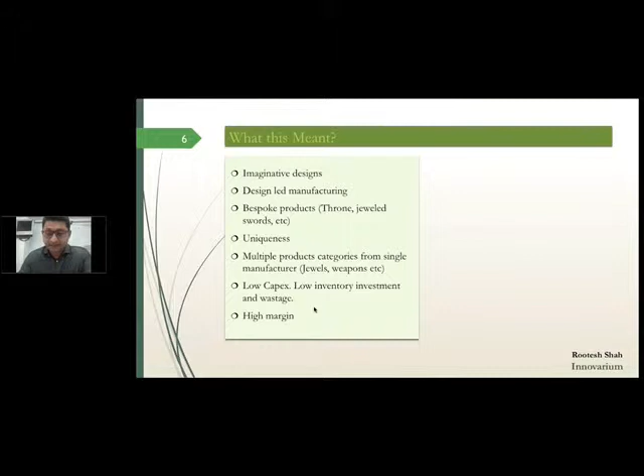There was no quality control. Products were very expensive. Delivery was slower. It was localized manufacturing, which means the best resources were never used. It was an inefficient way of manufacturing, and it was low volume.

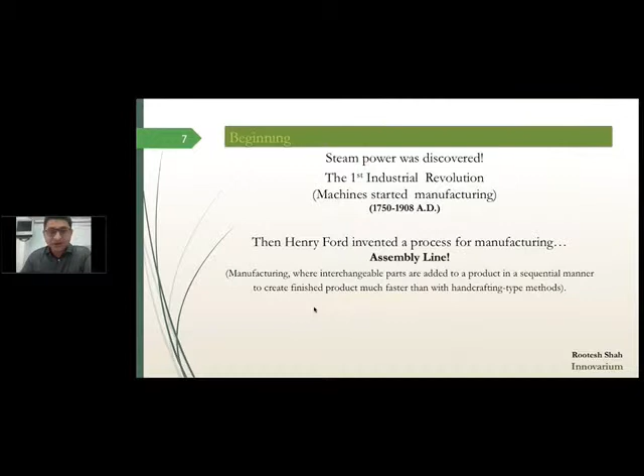Then steam power was discovered, and we had the first industrial revolution. With cars coming in, Henry Ford invented a process called the assembly line. An assembly line means - well, you know what, let me just show you what happens in an assembly line.

Even today, in spite of all the modernization, we still use assembly line manufacturing. So what are the pros? Now you have uniform quality, cheaper products, faster delivery, wider geographical markets, and efficient use of talents and resources, and you can now produce higher volumes with the same quality levels.

And what are the cons? Now it's manufacturing-led designing. You have standardized products. There's no uniqueness in ownership or experience. The manufacturing categories taper out for each manufacturer, higher capex, higher inventory costs, hence more working capital, and as you know, lower margins.

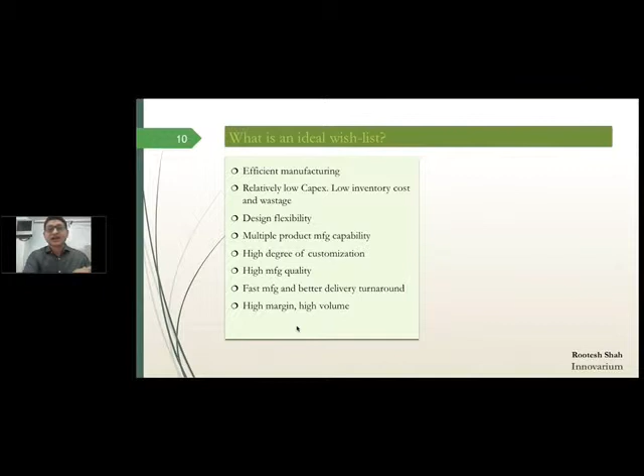So what is our wish list? Obviously, all the pros of the pre-industrialized way of manufacturing and the industrialized way of manufacturing. And of course, we don't want the cons of either of them. Is that possible? Of course it is. Well, if not all, then most of it - it is possible now with 3D printing.

However, that requires strategy and a manufacturing ecosystem around the 3D printing technology. This strategy is the pivot around which you can create your manufacturing ecosystem for 3D printing. So what is 3D printing?

3D printing is a manufacture of end-use components using additive layer manufacturing process. Let me come back to that point. Additive layer manufacturing - ever since man started manufacturing, they have used subtractive manufacturing, which means what?

You take a material of choice and then pare it down to the design that you require. For example, if you're going to make jewelry, you take a bigger piece of gold or platinum or whatever material of choice, then cut it, mold it, drill it, grind it, whatever, to the design required. And it was the same probably for every other industry. So for thousands of years, man had used subtractive manufacturing.

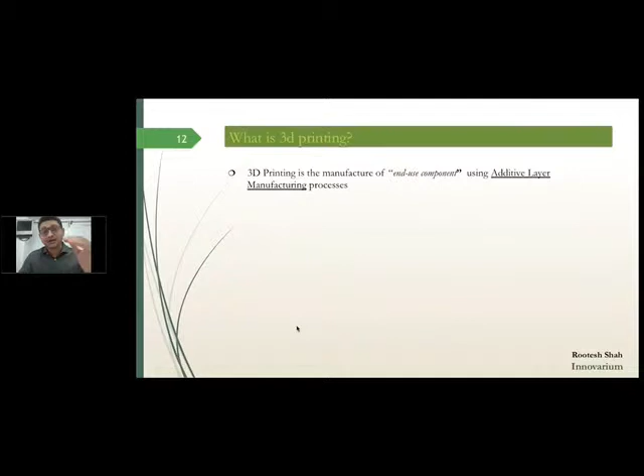3D printing is completely opposite. It is additive manufacturing, which means the 3D object or the end-use product is manufactured layer by layer till you get the object which is for end use.

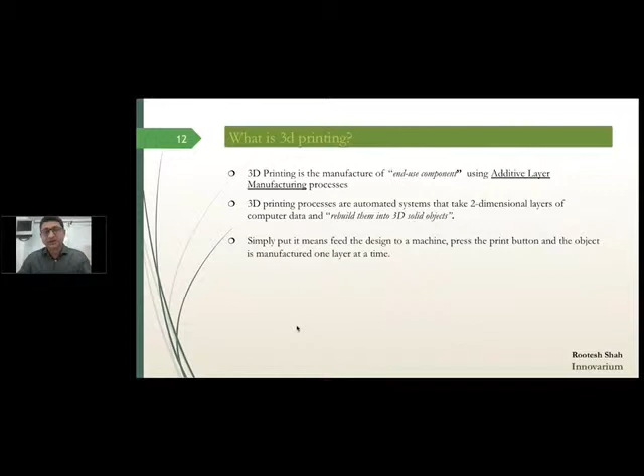The printing process is automated. It takes a two-dimension layer from the computer data and rebuilds that into a 3D solid object. So from byte to atom. Simply put, feed the design into a machine, press the print button, and the object is manufactured layer at a time without human intervention - meaning no forging, casting, or any of the conventional processes. Of course, this is a simplistic way of putting it, but this is the concept. As we go along, I'll explain further.

So how does the 3D printing process work? There are several technologies within the 3D printing umbrella. However, this is the common process throughout.

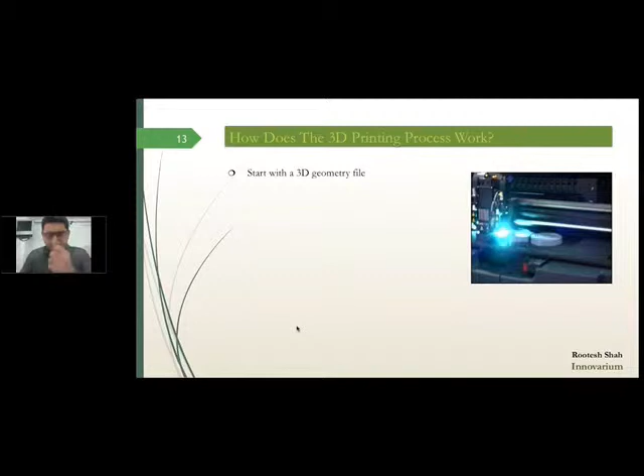To start with, you have a 3D geometry file, which is normally known as a CAD file in the jewelry industry, and which is fairly ubiquitous. From the CAD file, there are software that generate a .stl file, which is a file readable by the machine. The parts need to be oriented so that optimum efficiency is used for the machine.

Generate support structures - support structures can be generated by the machine and the software itself, or in case of metal 3D printing, you need special technicians to do that. There are software within the machines that will slice the files and supports horizontally.

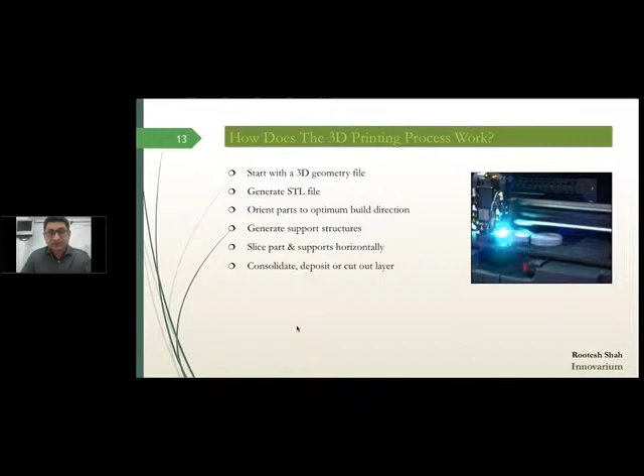The material is consolidated and cut layer by layer. The machine is indexed up or down, one layer at a time, and the machine starts the layering process, which is repeated thousands of times till the 2D design, read by the machine, is converted into a 3D printed object.

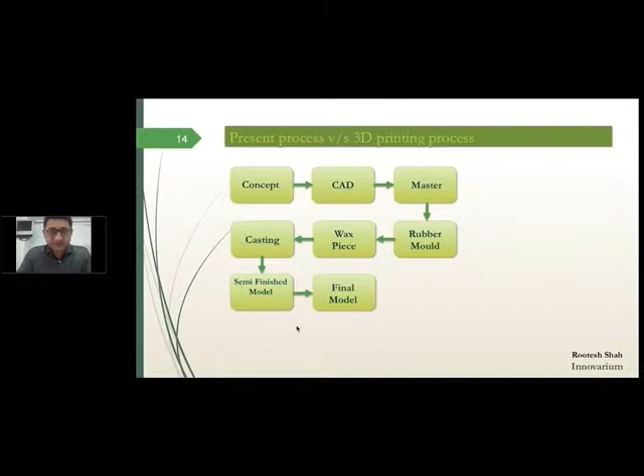So let's get a comparison in a nutshell. Say in investment casting manufacturing, you have the concept, followed by the CAD design, followed by a master mold. From the master mold, you'd make a silicon or rubber mold. You would shoot a wax piece inside that, make a tree, put it in casting. After the casting, it comes out a semi-finished piece which you polish, grind, whatever post-process is to be done, and then you have the final piece.

With 3D printing: concept, CAD, semi-finished model, final model.

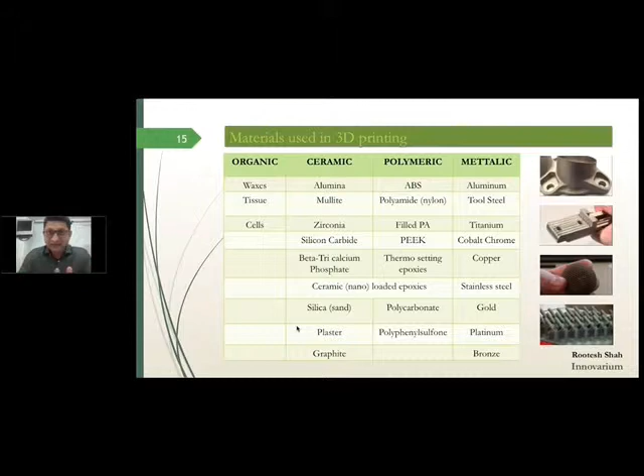So what materials are being used in 3D printing? Organic, ceramics, polymeric which are plastics, and metallic. The interest to us is the precious metals, so gold, platinum, silver is being used. In gold, 18 karat is the material of choice as it stands right now. 14 and 10 karat are in R&D at this point of time.

And who are using this? Car companies, defense, large production factories, avionics, medical, and consumer.

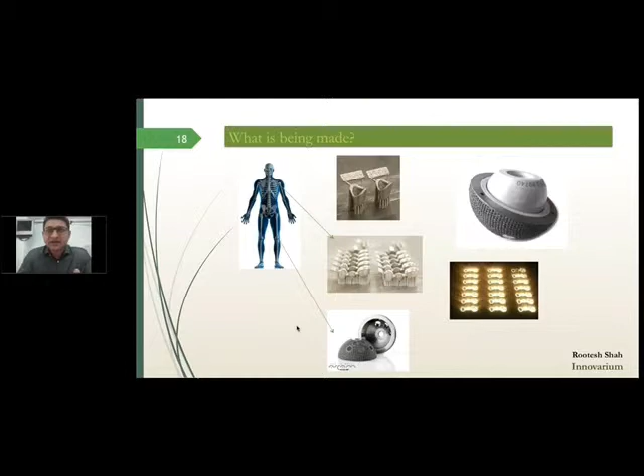These are some of the products being made. This is bespoke jewelry made in titanium. Critical parts made for high-tech industries.

So why all this fuss about 3D printing? Well, the creative commerce industry, which is the jewelry industry, is a design-centric industry. Each market is unique. Material loss is a very big factor to our bottom line. Customization is the mother lode which everybody wants at a minimal cost. Lead times from concept to delivery is extremely crucial. Inventory costs affects our cash flow dramatically. People are asking for lower quantities per design, more design variation, more design iterations per design, and our product life cycle is shortening. For each of this, 3D printing could be an excellent leverage.

So let's look through the different types of 3D printing technologies available for printing in precious metals. The first one being SLA. Most of you probably know this because it has been ubiquitous in the jewelry industry for the past decade and a half. Here, a photopolymer resin is used and an ultraviolet laser is used to draw on the resin to create the design that is required. But let's go through a video that actually explains this.

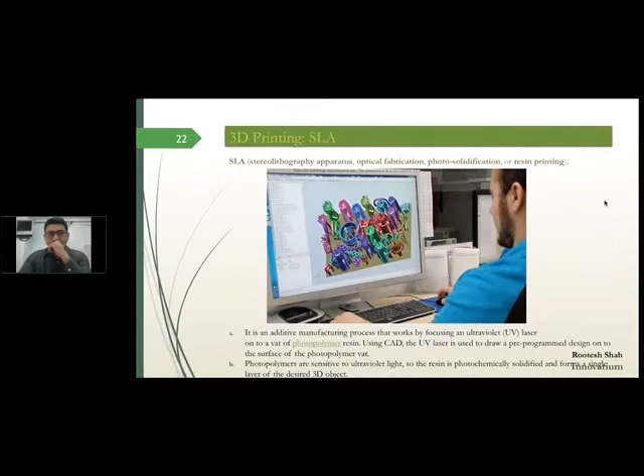Off the printer and then show a customer.

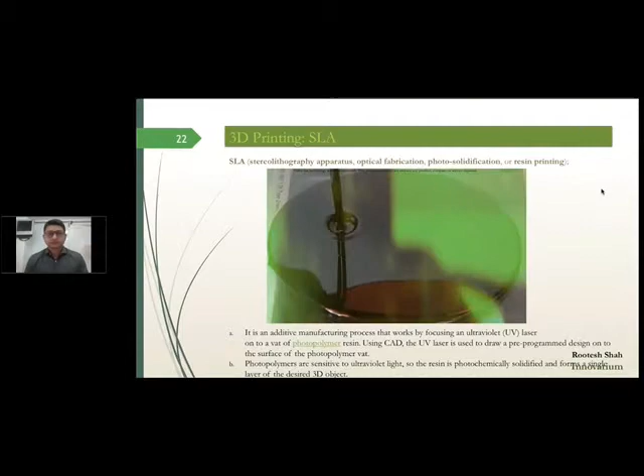We direct cast the PIC 100 green material, in my opinion, one of the best materials that EnvisionTEC offers, especially when it comes to the casting process. Customer will upload or send us...

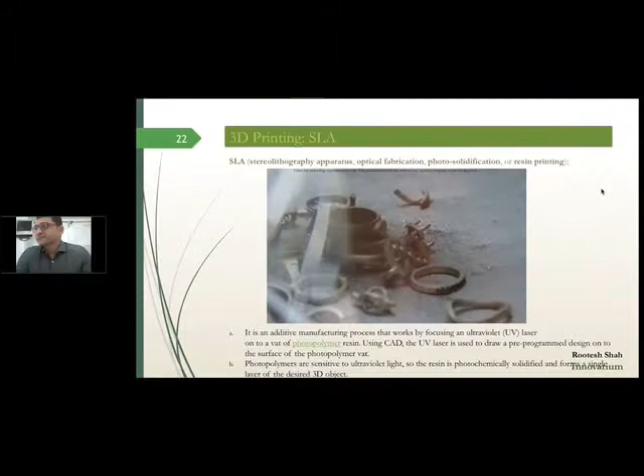So what are the advantages and challenges for SLA printing? Well, faster cycle time to make the master mold, a very high level of accuracy as compared to the traditional way of making molds. Open softwares are available. These are low-cost printers, making it very easy for even the smallest of jewelers to buy these printers.

What are the challenges? It is low volume and primarily for making molds and not production. It does not greatly reduce operations on the manufacturing floor, except for the mold making part. And well, of course, the silver master still needs to be made from the resin. But this is a good 3D printer for design validation.

The next one is digital wax printing. Instead of resin, now you have digital wax, which is a castable wax. This changes the method of 3D printing. Secondly, the 3D digital wax machines have a higher volume, which means that now you can take out production batches from the 3D printer. All the designs are digital, so molds are not required. All your molds are digital. Design iteration is virtually free of cost.

Let me show you a video for that.

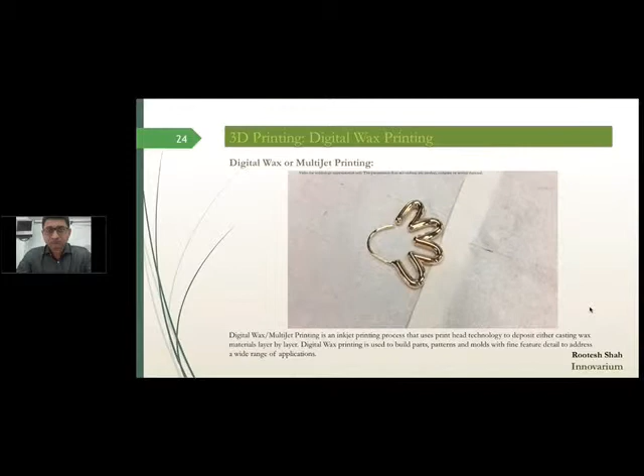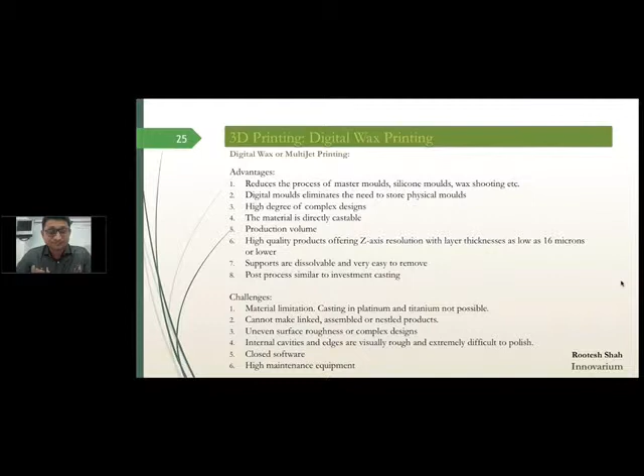So the advantages and challenges of digital wax printers: it reduces the process of master mold, silicone mold, wax shooting, etc. Just 3D print your designs in volume and send it for casting. Just brilliant. The digital molds eliminate the need to store physical molds. A high degree of complex designs is possible with digital wax machines. The material is directly castable.

You have an extremely high quality of product offering. The supports generated by the machines are dissolvable as seen in the video, and extremely easy to remove. The post-process is similar to investment casting, which makes it very easy to integrate within the existing system of operations.

The challenges: there are material limitations. You can't cast in platinum or titanium. You can't make linked, assembled, or nestled products. So products like bracelets or links with chains are extremely difficult to make.

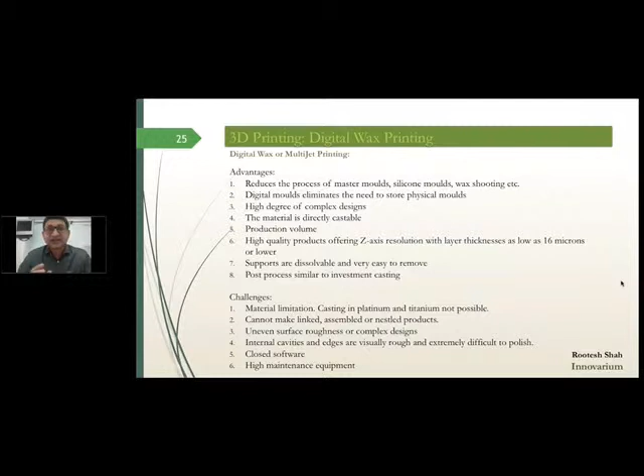There is uneven surface roughness in case of very complex designs, which are very difficult to post-process. The internal cavities and edges are visually very rough and are very hard to polish. And it's high maintenance equipment.

And last but not the least is direct metal laser sintering, or DMLS. It is also called selective laser sintering, or SLS, or SLM, which is selective laser melting. This is the one I'm most excited about.

Now, the difference between SLA and digital wax versus metal printing is that SLA and digital wax printers can be easily integrated into the existing manufacturing ecosystem, because after a certain point, it still uses the same manufacturing system which has been used traditionally.

DMLS eliminates all that, because with DMLS you print directly on metal. Hence, it eliminates even the casting process. Straight away, the 3D printer prints on gold, platinum, silver, or titanium powder. The parts are made and they go straight for post-processing and final shipping.

So how is it done? In the same probably way. It's a CAD file, which is turned into an .stl file. The second part is extremely important: a technician works on the 3D model to create the support structures.

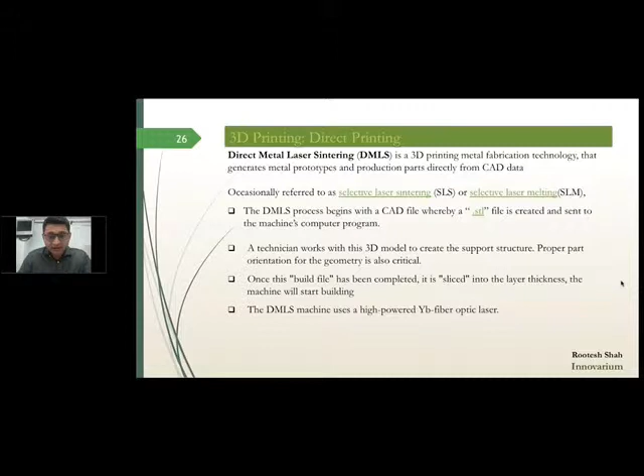Once this build file is completed, the design is sliced into thin layers by the machine's software. The DMLS machine uses a high-powered fiber optic laser. Inside the build chamber, the material of choice is in the dispensing platform, and a recoater spreads the material in a 20 to 30 micrometer layer.

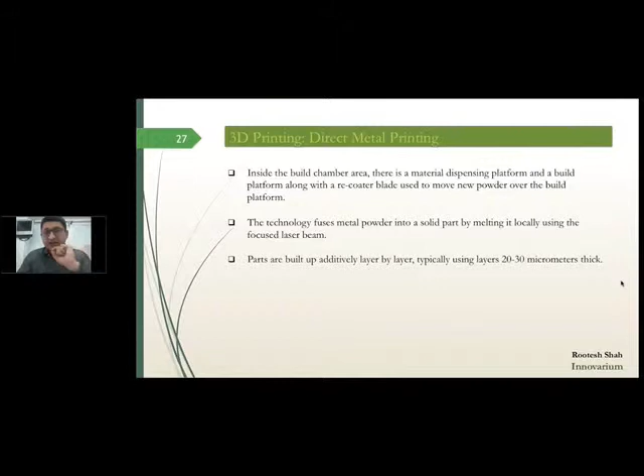The laser focuses its beam on the material, reading the STL file. It melts the powder where the design needs to be solidified. Once the entire job is completed, the build platform is extracted and the parts are physically cut from the platform. Then the parts are post-processed as required. So let's see a video that demonstrates the entire process.

What's your emergency? I need metal parts fast. Fast? Yes, fast. How fast? Like tomorrow. Tomorrow, eh?

DMLS allows for conformal cooling channels within tools and tooling inserts, as well as customized medical implants. It makes it possible to design internal features and passages that cannot be cast or machined. Complex geometries with multiple components can be simplified, eliminating the need for assembly.

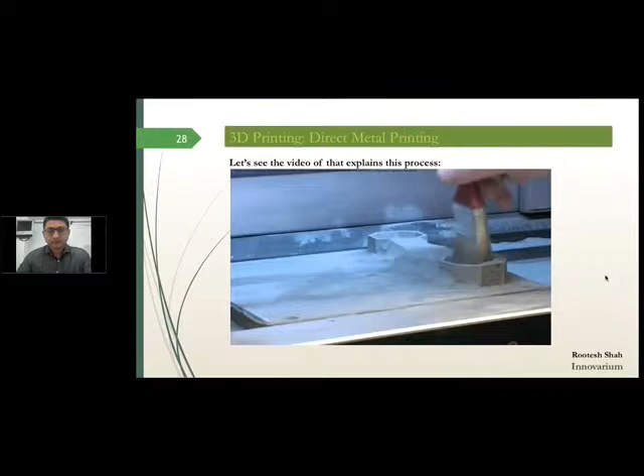The lead time for receiving a traditionally tooled part can take weeks, creating a large bottleneck in the production process. DMLS produces parts in a matter of hours or days, with excellent mechanical properties, high detail resolution, and exceptional surface quality.

DMLS parts can undergo functional testing in the environment for which they were designed. Since DMLS uses most alloys, prototypes can be made out of the same material as production components. The ability to generate functional metal prototypes in short order radically impacts design processes, accelerating design cycles for time to market.

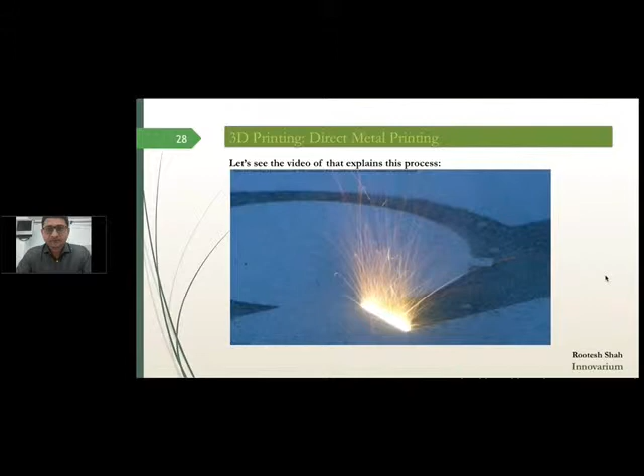The advantages do not stop at prototyping. DMLS is one of the few direct digital manufacturing technologies used in production, increasing design efficiency for technical applications. DMLS technology delivers unlimited potential for engineers to create previously impossible solutions, embracing a new era of design-driven manufacturing.

Delivery from GPI Prototype for the pressured engineer.

GPI Prototype? You guys are the best. Thanks a lot. Another happy customer.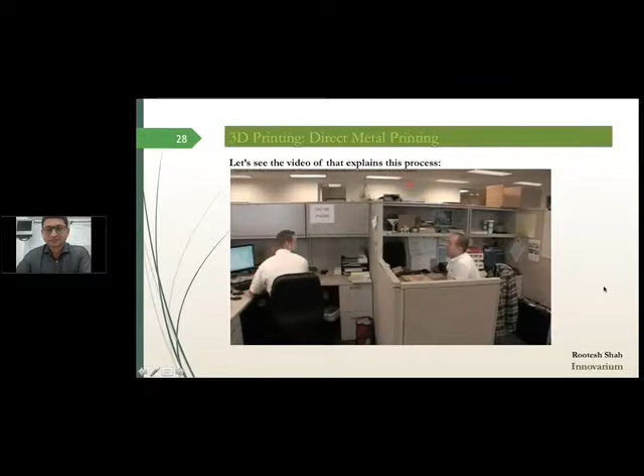So, what are the advantages of DMLS? DMLS can print in most metals and alloys, including platinum and titanium. So, for example, you can have hollow platinum and titanium jewelry.

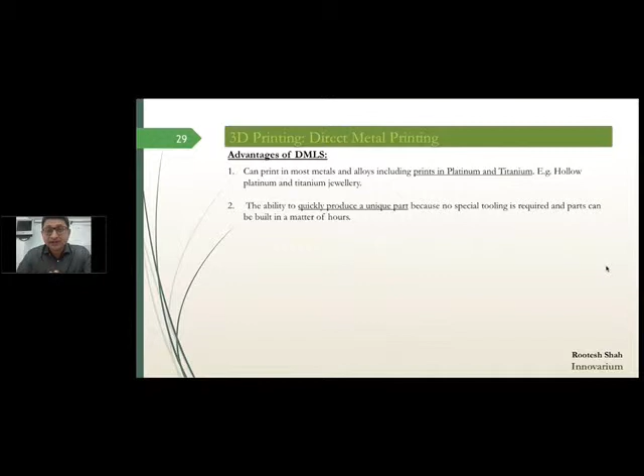This has the ability to quickly produce unique parts because no special tooling is required, like molds and things like that, and parts can be built in a matter of hours.

Since it's built layer by layer, it's possible to design internal features and passages that were impossible to do in casting, machining, or even other 3D printing technologies like digital wax or SLA technology.

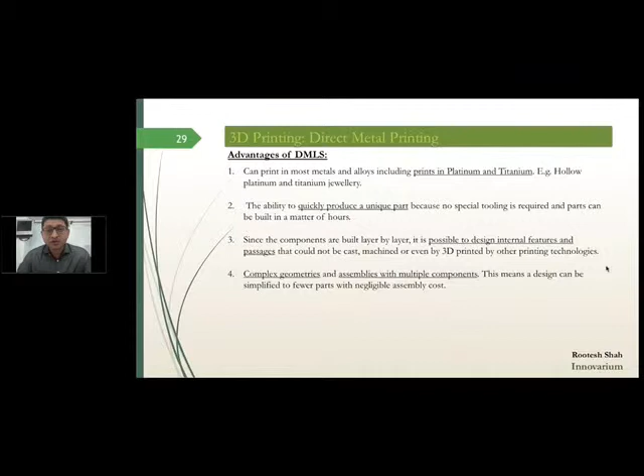You can make extremely complex geometries. You can make assembled pieces, with multiple components printing at the same time. This means the designs can be simplified to fewer parts at negligible assembly costs.

Since DMLS can use most alloys, prototypes can now be functional prototypes made out of the same material as a production component. For example, a functional prototype can be printed in brass before commencing production in the precious metal.

And DMLS does not require any special tooling or molds like casting, so mass customization and short production runs for complex designs are absolutely possible.

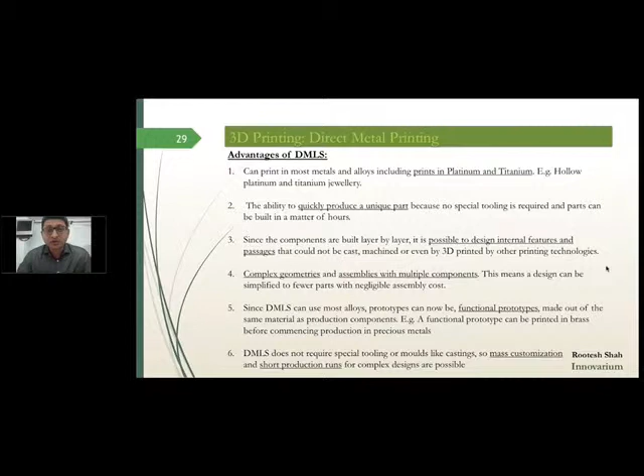And what are the challenges? It has a high capital cost, well, in relative terms.

It's getting disconnected. Got it. Disconnected. Alright, then we continue with that.

So, challenges of DMLS: high capital cost, well in relative terms. A few years ago, a machine would cost somewhere about 250,000 euros for precious metal machines. It has come down to less than 100,000 euros, and the costs are going down.

The system needs to be operated in controlled environments because gas is used in the vacuum chamber.

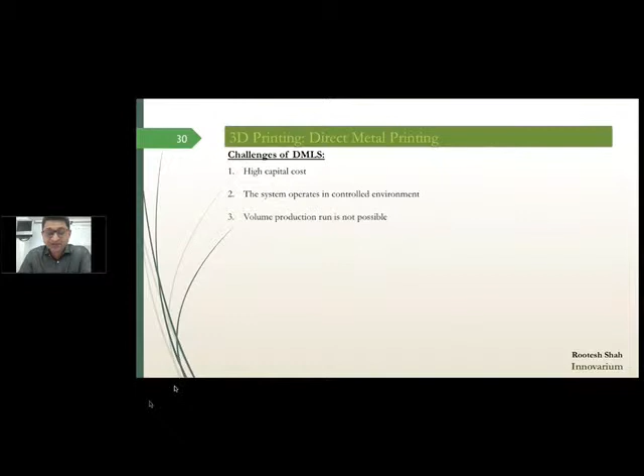Volume production run is not possible. We can have short batch production, but not volume production as in digital wax.

It requires additional equipment for post-processing, especially to take out the support material, although this post-processing equipment is not very expensive.

Very importantly, it requires a separate skill set to create designs for this technology, because far more complex and unique products can be created, and the support system is an integral part of designing.

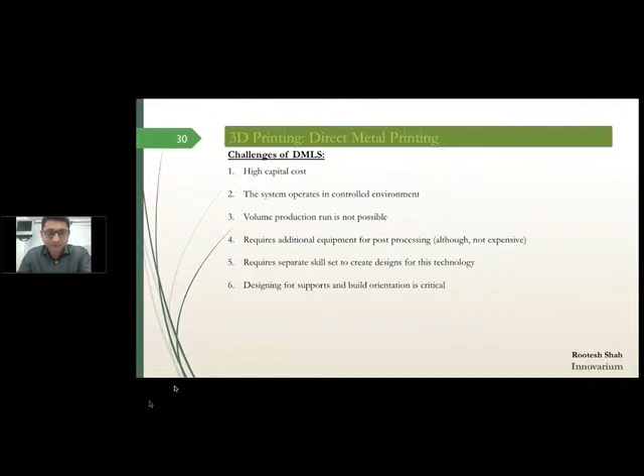The printed supports cannot be reused, so typically these supports are melted to recover the metal.

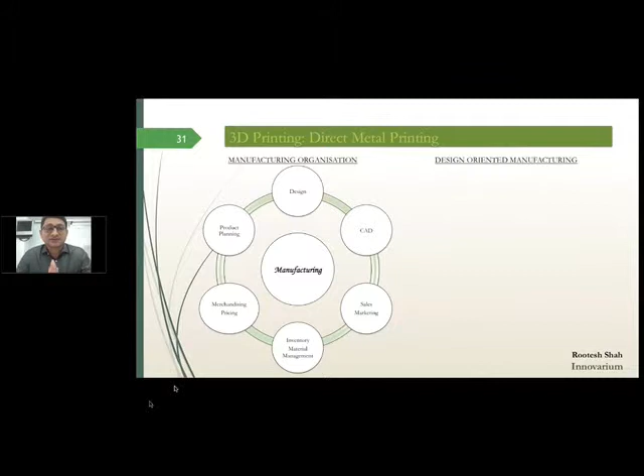One of the key philosophies of direct metal printing is that it is not a manufacturing-led system. In any other way of manufacturing, the actual fabrication is the key, and design, CAD, product planning, merchandising, everything is centered around fabrication. The limitations or opportunities that fabrication provides are what design, product planning, and material handling revolve around. With DMLS, it is design-led manufacturing, which means design is the key.

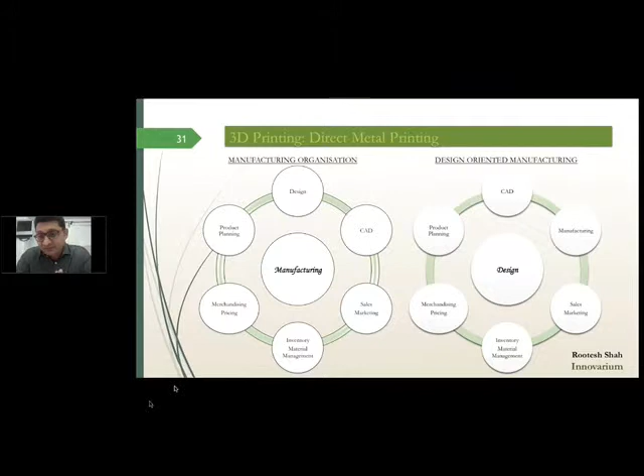Manufacturing, inventory, merchandising, product, CAD, everything centers around design. This comes back to my first point, that 3D printing allows design to be value-added rather than the manufacturing strength. And this is the key to 3D printing in direct metal.

To have a short analysis of printing in direct metal, there are 4 aspects to it: whether you're prototyping or in production, meaning short batch production; the part orientation, including the geometry of the design and internal features; the file preparation, which includes support structures, orientation of the part, and the platform build; and last, the process, meaning what happens after the piece is printed and the process in its entirety.

I personally believe that 3D printing equipment, or the 3D printing machine, is only one link in the overall 3D process chain. Design and post-processing, while time consuming, are extremely important to achieve optimum part quality.

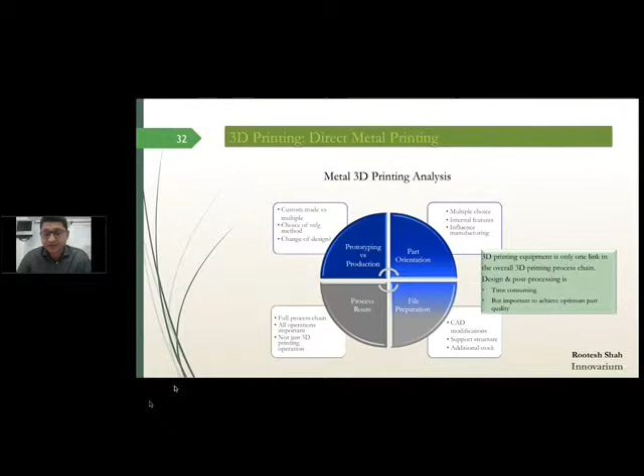A word on supports. Supports are extremely critical while printing directly on metal, and they have their own functions: they support the melted surface, dissipate heat from the surface, and prevent the surface from deforming. It's a necessary evil.

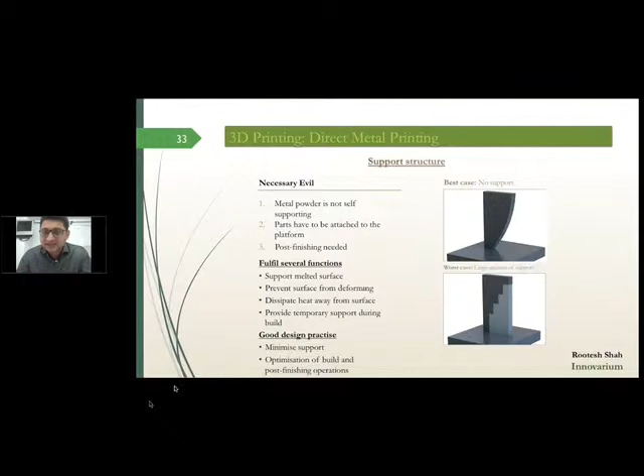I've also seen that many designers who have used DMLS have actually incorporated the support structures within their design, creating a separate design element, which is a very clever way of using the DMLS process.

So let's go ahead and see a video of actually printing gold parts.

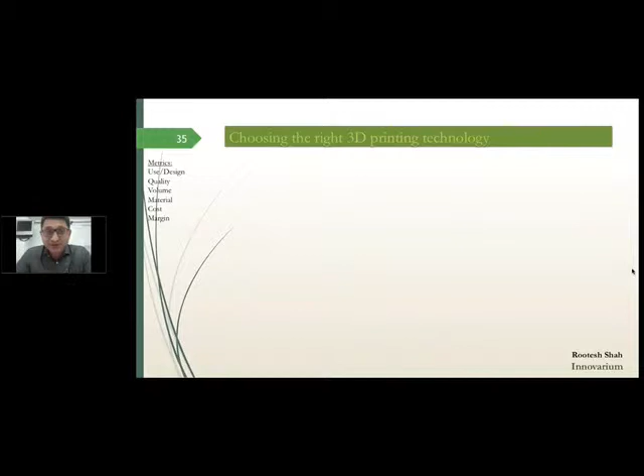This clears up and gives you insights into the 3D printing technologies which can be used for precious metal. But the next question is, how do you choose the right 3D printing technology for your operations? For that, I would use some metrics for deciding that.

Number one is, what is the usage, or what kind of designs you would like to generate? What is the quality level? What are the kind of volumes? What is the choice of materials? What is the cost involved? And of course, at what price and margins will you be able to sell?

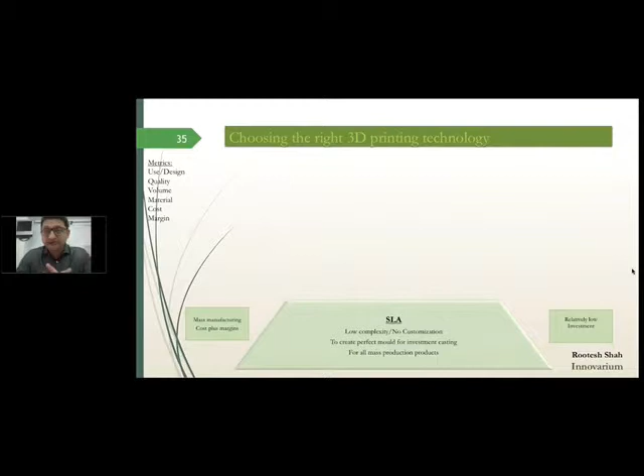SLA, of course, is the choice if you are going to go for very low complexity without any customization. It is a very low investment, and it could be used for mass manufacturing, and the margin strategy could be a cost plus margin.

The digital wax printer gives you semi-customized, a very high degree of complexity. You can make hollow gold and silver products, take special orders, special collections. It's a medium investment. A smart manufacturer could have product-wise market share depending on the design capabilities, and it could be an incremental margin strategy.

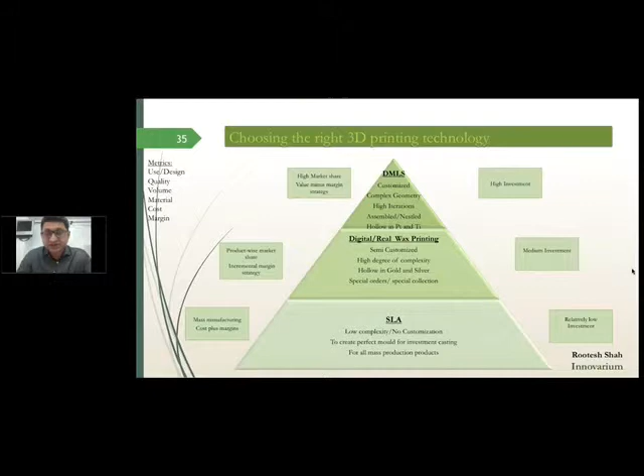DMLS should be used for customized jewelry with very high degree of complexity, with high iterations per design. If you have assembled or nested pieces, as in bracelets or chains and things like that, or for hollow platinum and titanium products, here it's a high investment relative to the digital wax or the SLA printers, but a manufacturer who can combine the existing technology with DMLS can get a very high market share, and the strategy could be a value minus margin strategy.

Having seen what kind of 3D printers are available for printing in precious metals and how to choose them, it's important to have a strategy and to create an ecosystem around 3D printing. As mentioned earlier, just the 3D printing machines are not going to do the trick. It's how a manufacturer creates a focused manufacturing system around 3D printing.

So the strategy will decide what kind of markets you will cater to, which in turn defines what kind of products you're going to make, which also decides what kind of 3D printing technology you will buy. So the questions to ask for acquiring machines are: which printers will you acquire, where will you build them, for which material, how do you define your product strategy, how will you hire people, and how do you create processes. That's one part of the ecosystem.

The second part is that once you have the physical part of the manufacturing system, how do you build teams around 3D printing technology, who spearheads it, how do the teams communicate, and how do you create systems to enable teams to respond faster to the market feedback for the designs which could be 3D printed. But most importantly, every member of the team needs to understand how 3D printing could be leveraged. Hence, communication is very, very important.

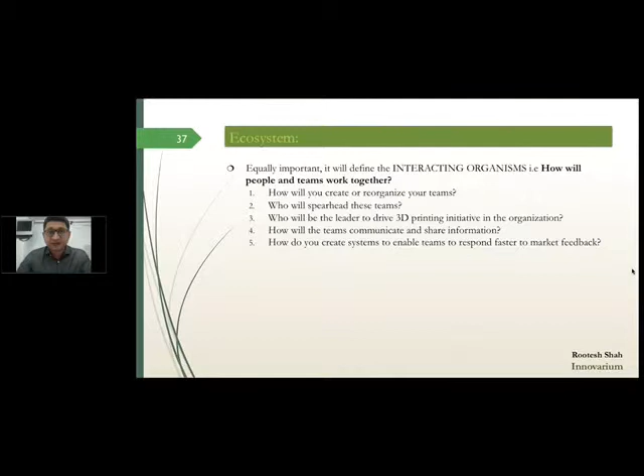To create a very profitable roadmap, a 3D printing manufacturing ecosystem has to be based on a sound strategy. So typically, this is how an ecosystem would look like. You would have a 3D printing leader who would have all the critical information and is the pivot around which the entire system operates.

Then you have the designing team with its functions, the R&D team, the CAD team, manufacturing, post-process and QC, sales and marketing team. Now, traditionally, there would be a lateral way of working, in which each department works in a silo and really doesn't know what the other department is doing. With 3D printing, that doesn't work. Each member of each team needs to understand what is happening. Hence, the communication would be all around. All the design teams would communicate to the leader as well as to each other.

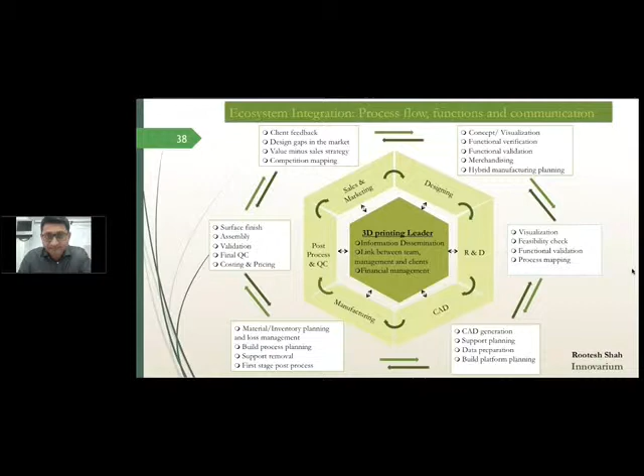And why so? Because each member of the team needs to understand which criteria is being leveraged when using 3D printing. Is it the material cost? Is it the design? Is it the tooling cost? Is it the assembly? Is it the lead times that you're addressing? Is it the customization? Is it the low quantity but high quality production? Or is it the just-in-time inventory?

3D printing can address all these issues provided each member of the team and all the departments understand the potential of 3D printing in which to leverage these parts. It is vital to create an environment to enable the teams to view 3D printing as a complementing technology and not a competing one. And most important is the leadership, who should work continuously to integrate 3D printing within the manufacturing ecosystem. Only then is 3D printing most effective.

So let's go to pre-build, post-build, and hybrid manufacturing. Pre-build and post-build refers to those parts of the production process which do not have anything to do with the fabrication of the 3D printed parts, meaning everything that happens before and after the machine prints. The total time taken for pre-build and post-build is 65 to 70%. Hence, it's imperative to think through them in terms of the complexity of the geometry, which is your design, and what kind of material you're using.

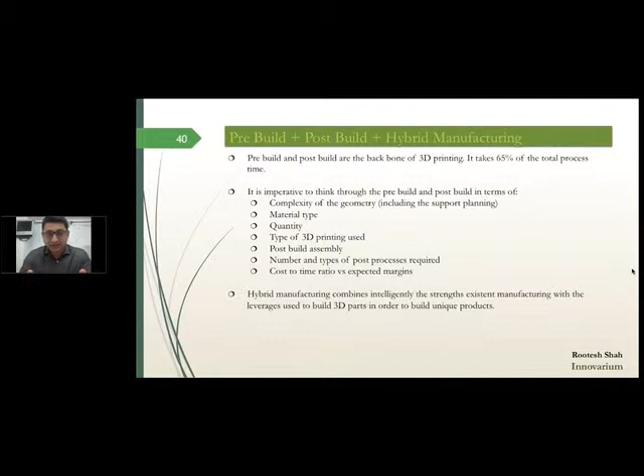Hybrid manufacturing is actually combining your existing strengths with the strengths of 3D printing to create newer products and newer markets and to build very high entry-level barriers. If used well, it creates new business opportunities and an opportunity for higher margins. 3D printing allows new product categories and designs previously impossible to make.

So in terms of teams, this is how it would be segregated. Pre-build will have designing, research and development, CAD data preparation, sales and marketing, because they give the market feedback. Post-build provides post-build processing, assembly validation, QC, R&D, cost and pricing, logistics, sales and marketing. And build has manufacturing and material management.

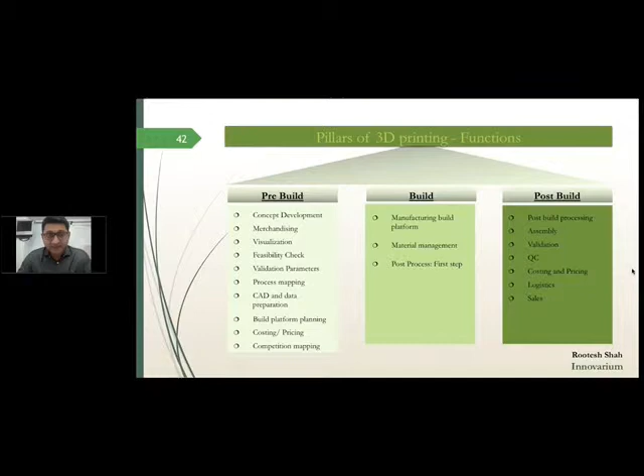And in terms of functions, pre-build and post-build, as you can see, have the maximum amount of functions. Build has minimum. And that would give you an idea that a 3D printing ecosystem has to have a strategy.

After doing all that, it's also vital to plan your products for 3D printing. As a thumb rule, if a product can be done effectively with the conventional way of manufacturing, do not use 3D printing. However, if your designs are inefficient to produce conventionally, or require faster lead times, or require low weight, then 3D printing is your choice. Within that, search for the cheapest 3D printing technology that can satisfy your orders.

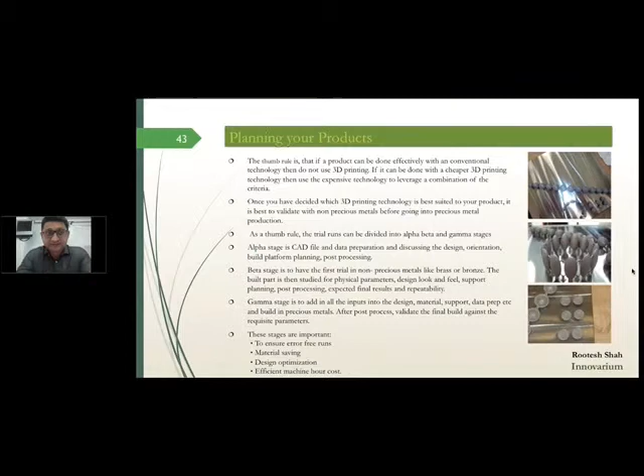Once you've decided on the 3D printing technology to be used, it's best to validate in non-precious metals before going into production in precious metal, especially with DMLS.

As a thumb rule again, I would have 3 stages of trial run: alpha, beta, gamma. The alpha is typically on the computer at a data stage, where the data, the CAD file, and the build platform are validated by the design, R&D, and manufacturing team. All that information is collected and fed into the beta stage. By this time, a lot of your designs would either be rejected or need to be modified.

At the beta stage, you have the first trial run in a non-precious metal like brass or bronze. This is for the functional and physical verification of the design. The part is then studied and validated for the design, look, feel, the support structure, what post-processes need to be done or should be planned, the expected final qualities, and the tolerances and repeatability of the design. Sometimes it's great to have a complex design, but extremely difficult to have repeatability, and that gets eliminated at the beta stage.

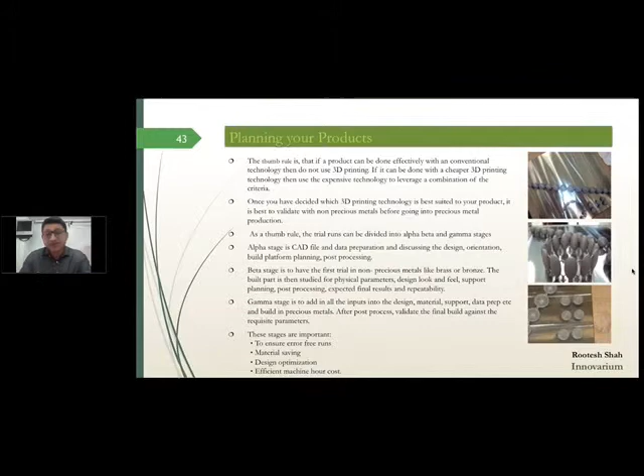So finally, let's have a little case study in pre-build, post-build, and hybrid manufacturing. This is part of an earring which needs to be 3D printed. If I needed to print this in gold or silver, I'd probably use a digital wax machine, especially for a volume run. If it's a one-off, low price piece, I would instead make it 3D printed in SLA and then make a master mold out of it.

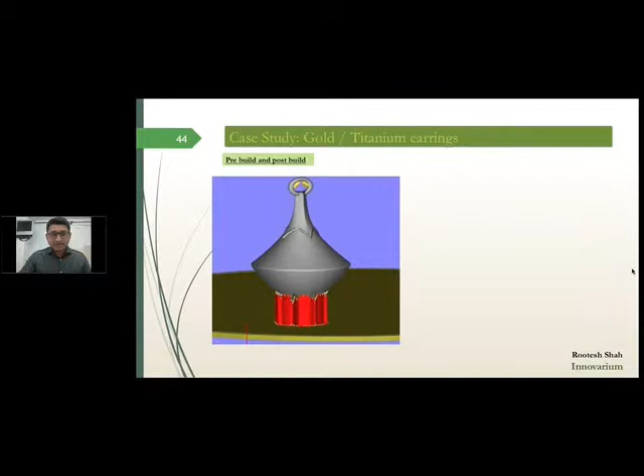As you can see, the red parts are the support structures, and these are the design notes. It says this is a good design suitable for DMLS. If I were to make it in, say, platinum or titanium, it's hollow and has self-supporting angles, so minimal supports are needed, which is great because the post-processing costs are lower. The wall thickness is about 0.5 mm.

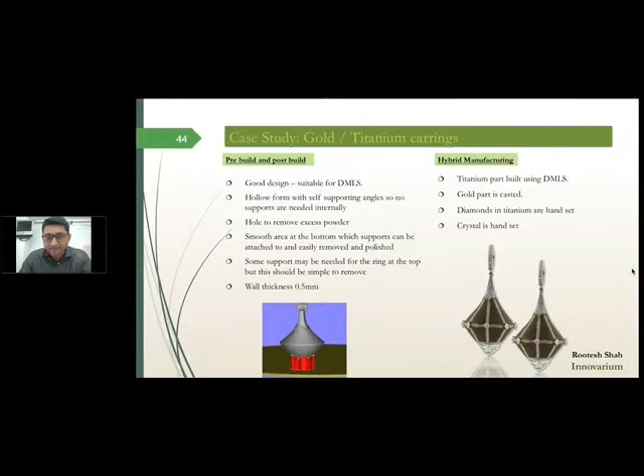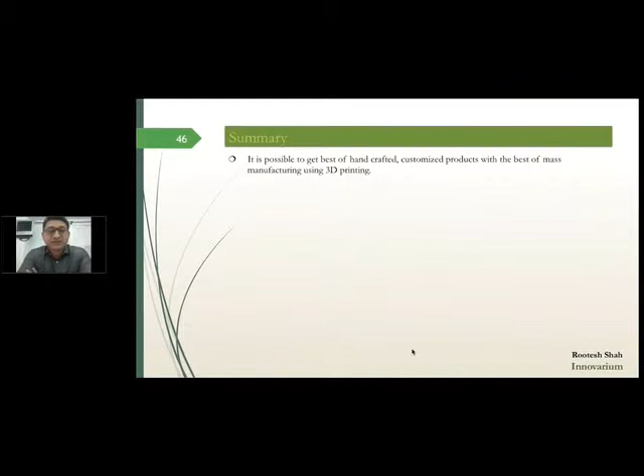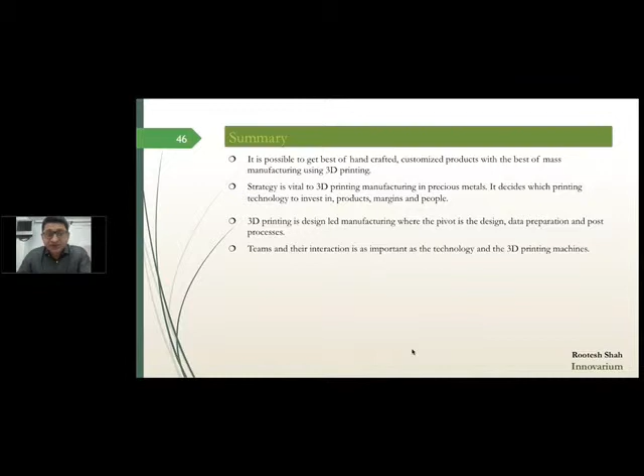So in summary, it is possible to get the best of handcrafted, customized products with the best of mass manufacturing using 3D printing. Strategy is vital to 3D printing manufacturing in precious metals. It decides which printing technology to invest in, which products, what kind of margins, and the people to invest in. 3D printing is design-led manufacturing, where the pivot is the design, data preparation, and post-processes. Teams and their interaction are as important as the technology and the 3D printing machines.

Pre-build and post-build processes are the main pillars of 3D printing. Supports are a necessary evil. Trial stages with non-precious metals during development are an efficient way to produce repeatable designs in precious metals. And hybrid manufacturing is a powerful process that combines the best of existing manufacturing resources with 3D printing, creating high entry barriers and opportunities for margins and market share.